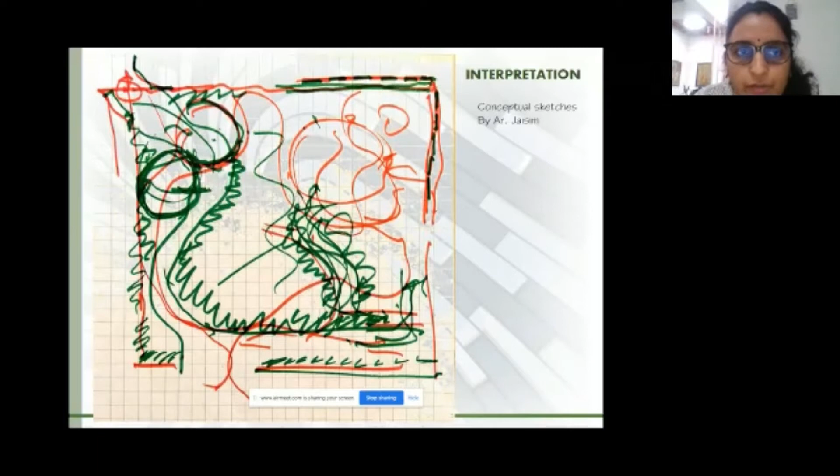So these were some of the initial sketches by Jaisim sir, where we see the land and something very organic taking shape. All the green you see is the greenery that finally got translated onto the land. We were trying to integrate the built space, the unbuilt space, and the greenery in between.

This was a little later when we started defining spaces, bathrooms, bedrooms, the actual names and physicalities of spaces.

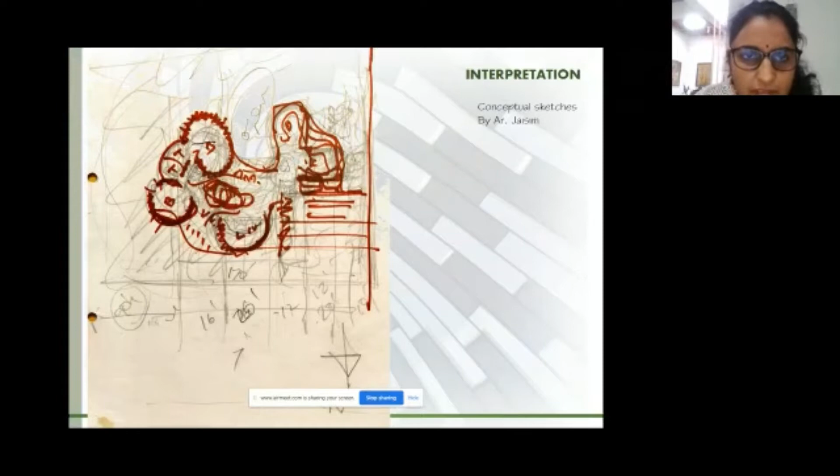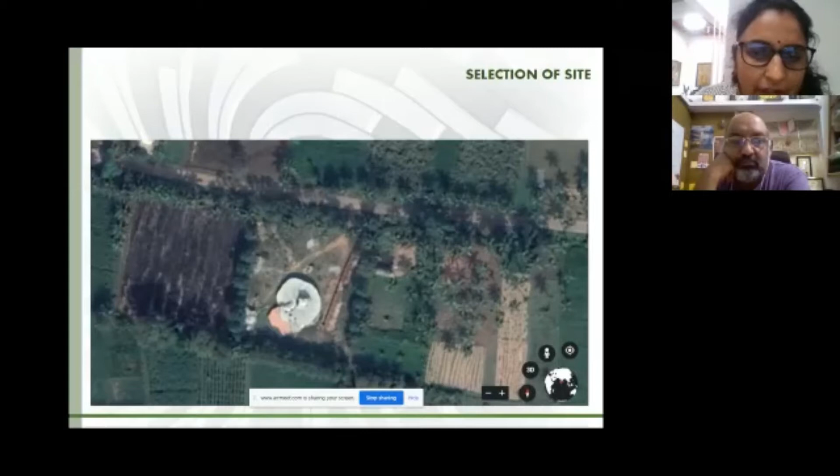So this was the original piece of land that we had to build on. And this wasn't the original site that we were going to build on. But when we did go to site, Jaisim sir saw this piece of land and said, why not this? It offers you beautiful views from everywhere. It's inviting, yet it's not exactly on the main road. It doesn't assault you, yet it invites you quietly in, and lets you explore the form and the building.

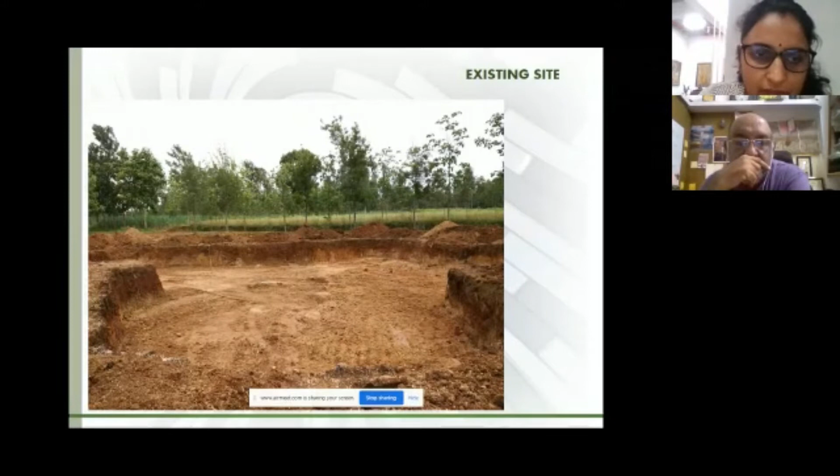Some initial pictures of how the site was. While the site itself was fairly flat with small mounds and little undulation, there wasn't very heavy, dense greenery around. There was very light, pleasant greenery that stretched for acres together. It was fairly good soil, a little gravel here and there, but apart from that, pretty good soil.

So just a little quick fact about the site. The home sat on a parcel of land that was approximately 70 feet in diameter.

Taking you through the site plan, the entire thing has evolved very organically. You don't find definitions of what we consider as rooms, 10 by 12, 14 by 16, or whatever. The entire thing is just as nature is, a reflection of the nature around it.

There's a pathway that leads you to the house, where there is an entrance that leads to a small transition space. Once you are in this transition space, you can make a choice. You either go downstairs to the more public spaces, the living area, the kitchen, the dining, the pond, and the little gathering area, or you go upstairs to the more private spaces, the bedrooms and the library.

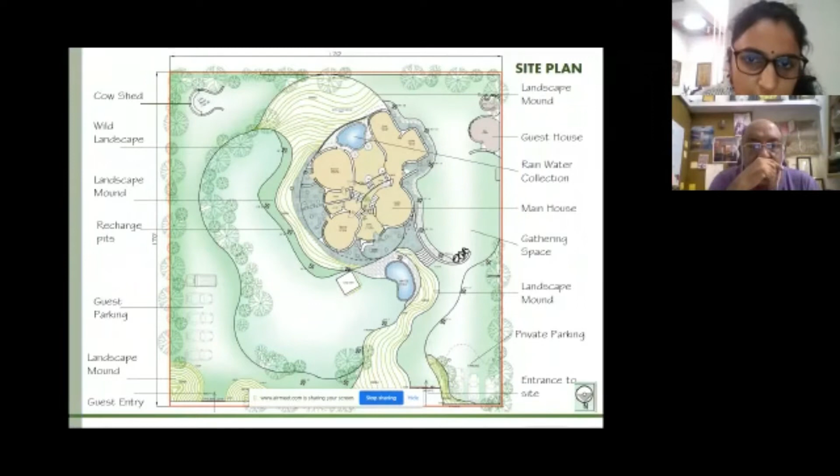If one decides to move up from the foyer this way, there is the daughter's bedroom, two bathrooms, and a master bedroom. They share a huge balcony because we believed the balcony shouldn't just be somewhere you go out and sit with a couple of chairs, but more a place to have activities.

You can read there, you can study there, you can do hobbies and crafts there. So it's quite a big one, a part of your room for both of them.

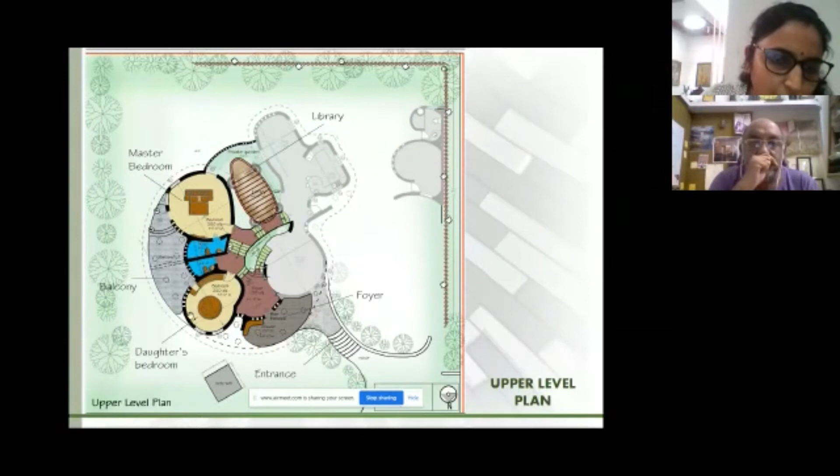It's an interconnecting space. There's a little courtyard in the middle that pulls in light from above, as you'll see later, and distributes it to the rest of the house. And the topmost level is the library. This is both symbolic and physical, knowledge being at the uppermost space of any being.

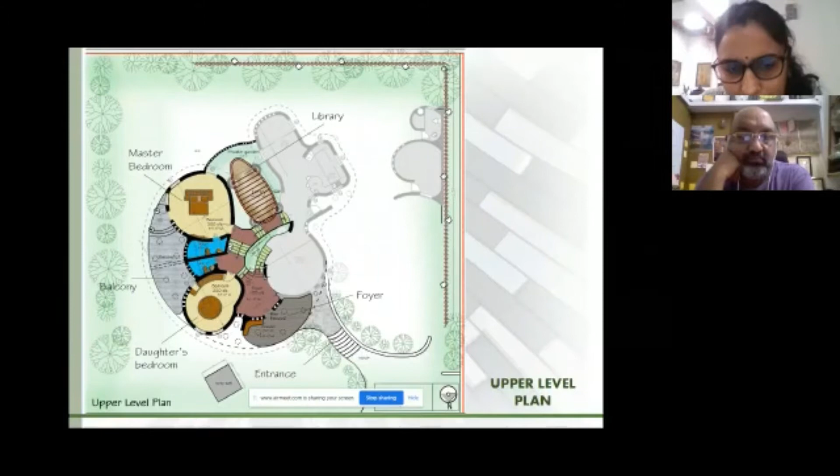If one decides to go down from the foyer, they get the public spaces, which is this living area. There's a little courtyard area that can be accessed from there, the kitchen, the dining. This pond is a rainwater collection pond.

There is a perforated wall come roof on top of it that lets rain in, but not too much either. So that pond collects it all.

There's also a little multi-purpose hall, since they had a lot of activities that involved gatherings of people, sometimes 25, sometimes 50, and we wanted a little hall that took care of all of that, whether it was social meetings, business meetings, or party meetings.

Onto the side, we initially designed a store with a bathroom that could be accessed from this area. But while we were building, the space turned out to be so beautiful that it's now converted into a guest house.

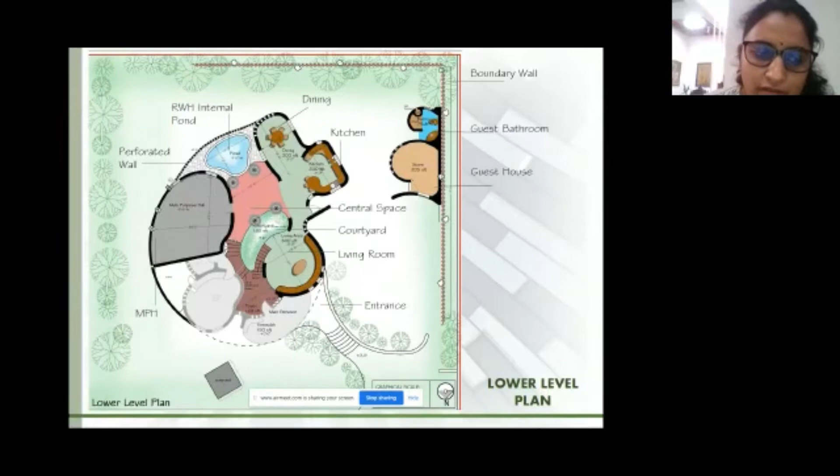As we started construction, one of the first things we did was make sure we waterproofed the area. This was a structure that was both framed and load-bearing. Before any of that happened, we did a base preparation, a very simple, clean, and elegant way of waterproofing.

We used canal liners and then did a layer of PCC. These canal liners went from the bottom of the structure all the way to the ground and a little above. So even if there was seepage, the water would travel along the liners and get out at ground level, not really getting into the structure.

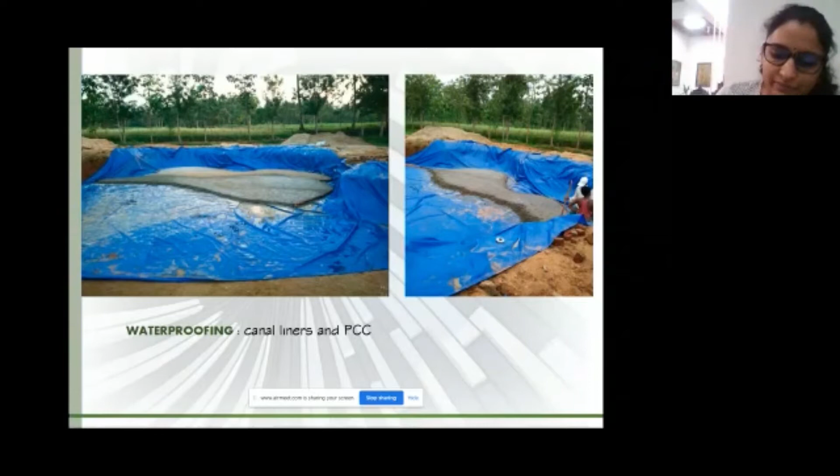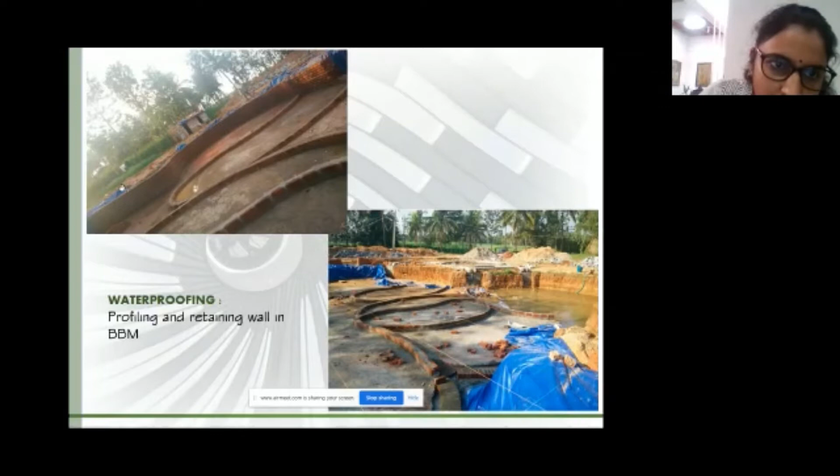Just after we did this, we profiled the space also. These are the canal liners that have come from the bottom area right to the ground level. Just after we finished it, it rained, so it gave us a really good chance to see how well the system was working, and it worked quite well.

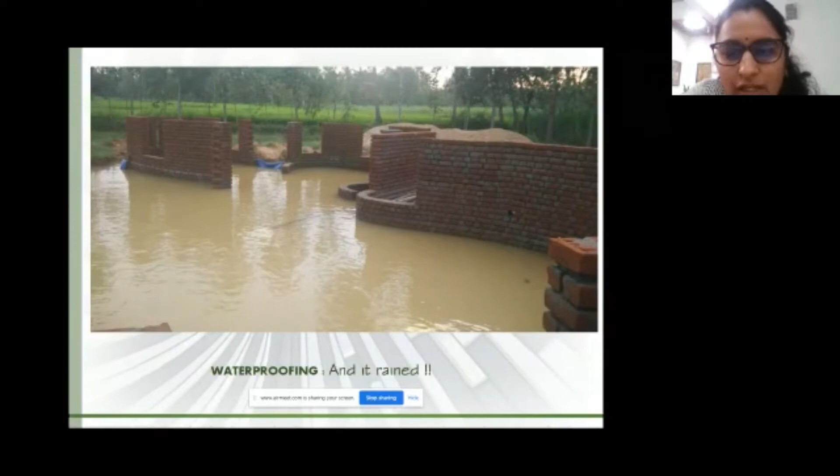Once we profiled the area, it was again all about surface preparation and building it up. The house sat on a large PCC bed. There was reinforcement here and there, but apart from that, we didn't do conventional foundations where we dug 6 feet, 8 feet below. This house didn't require that. As a structure, it sat on the PCC bed itself.

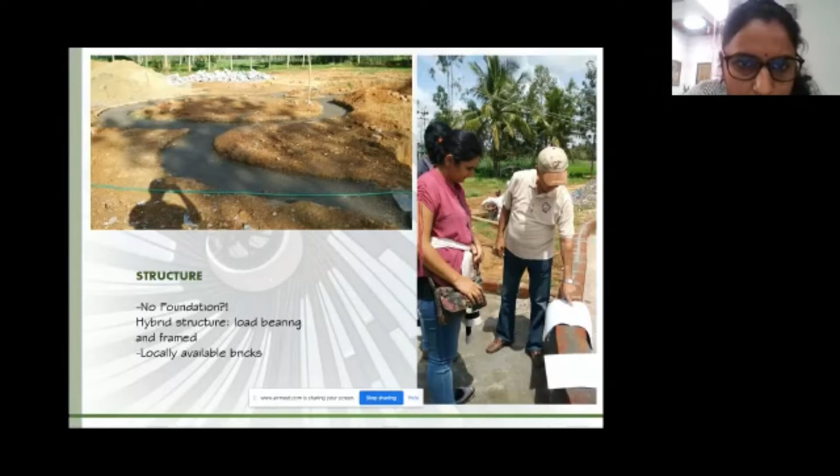The soil was fairly good. Parts of the structure were above ground, parts were below ground. The amalgamation of that let us work this system out.

A majority of the structure, we have used locally available burnt bricks. In some places, we have used them horizontally, in some places vertically. We've explored a lot of what could happen with a single brick in terms of masonry, in terms of how they can aid openings, and in terms of how they can add to the visual elements.

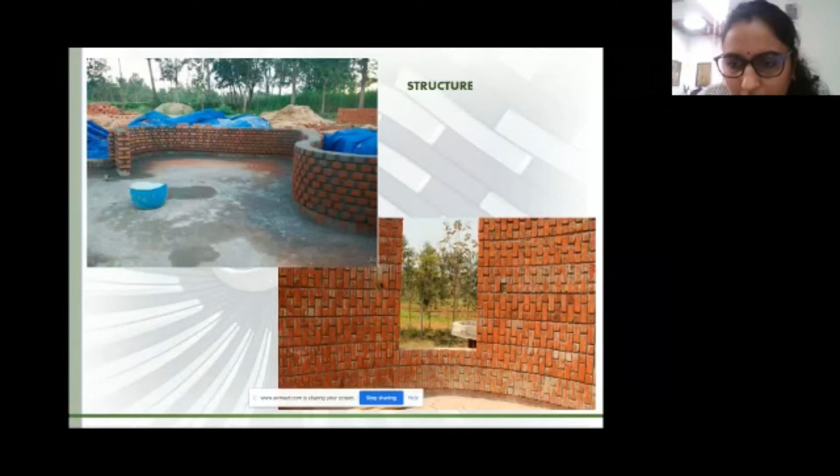So we experimented a little here and there. Then came the structure. The central hall has 4 large pillars on which the library sits. This particular portion of the house is attached and yet not attached to the rest of the house. So this was the base preparation done for the structure, and we erected pipes on these solid, beautiful rocks that were around that area.

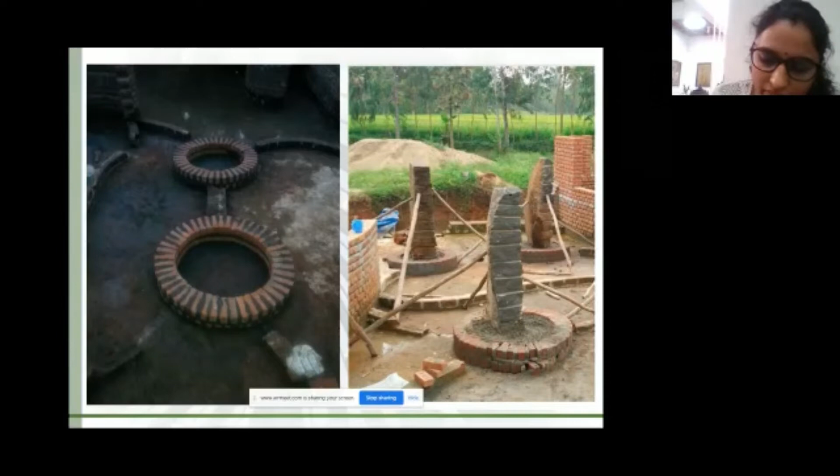At this stage, we had a lot of people coming and asking, why did you put them in the first place if you don't need it for the roof? Is it just for aesthetics? Is it just for fun? Does it have no function? We didn't answer anybody at that point because the best was yet to come.

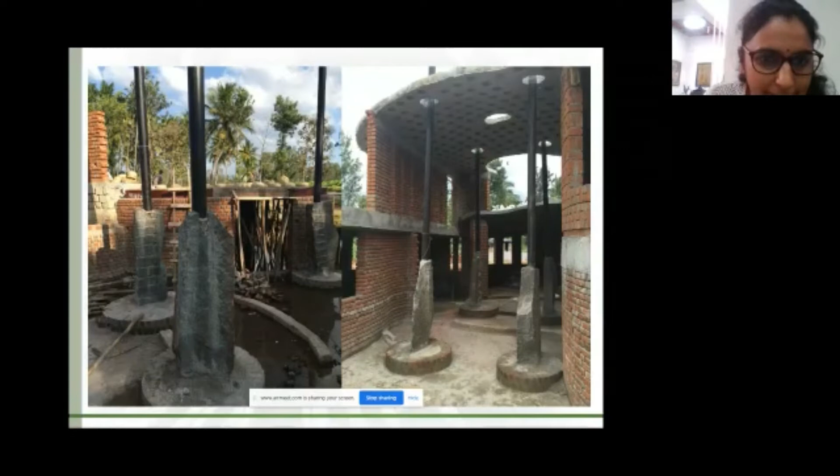Some more pictures of the structure as it was shaping up.

One of the most challenging things about this structure was the centering. As with the plan form and 2D, even the 3D form was very naturally flowing and organic. It reflected the elements around it. It was very difficult to get people to do centering that wasn't on a flat plane, or what they were used to with conventionally pitched roofs.

To do this took a lot of time, a lot of effort, and also a lot of educating the people there. Initially, when they saw the drawings, when they saw the model, most of the people who had volunteered to do the job said it can't be done. But it did take a little time to educate them, to go through it piece by piece logically and tell them how centering could be done.

And once that happened, the roof of the structure evolved in such a way that it started at the ground in one place and went all the way 2 floors up. These are some of the pictures.

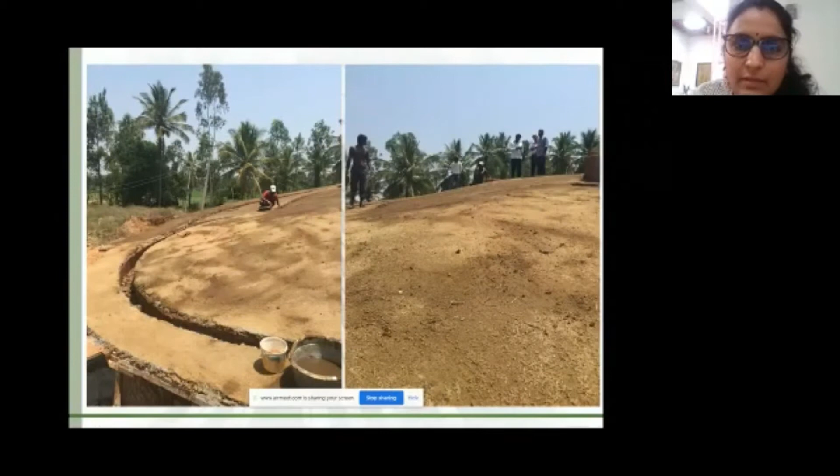If you can see this picture, that's the lowest point in the roof behind Jason sir there, and that's about 6-7 feet off the ground. It's like walking up a rolling hill. That's how the roof structure was.

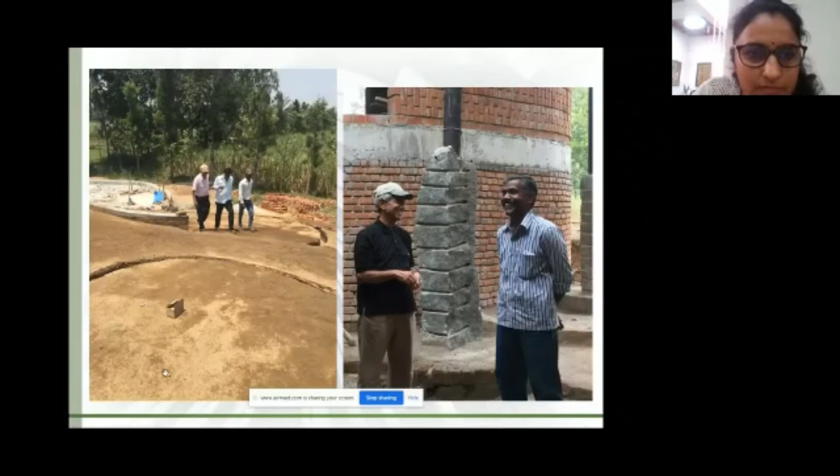So once the centering was done, we used custom-made pots and custom-made clay vents that would let hot air out from below to do the roof. Some places we used baskets that were made for this project because we needed them to be a particular diameter and a particular depth. Everything in this house was designed to detail. We didn't pick up anything that was readily available from the market. It wasn't a mass-produced thing.

We calculated, we designed, we sat and came up with all of these. These were made especially for the project. They let in light and took out hot air at the same time. And because we used these filler slabs, the entire place was cooler than what would have been otherwise.

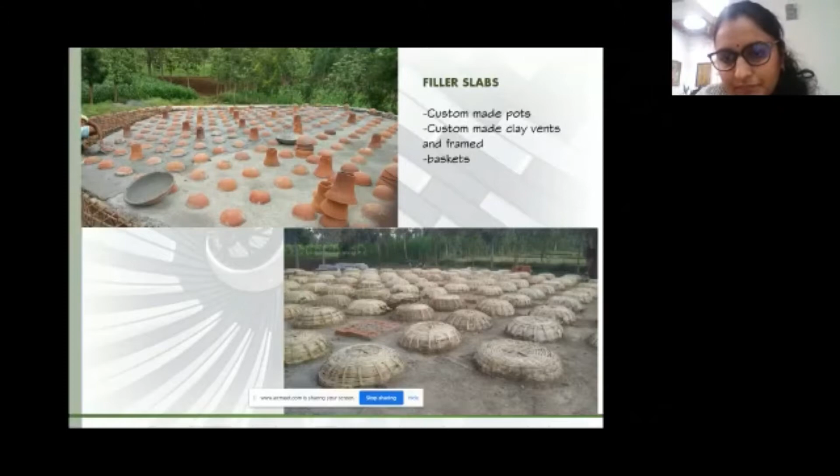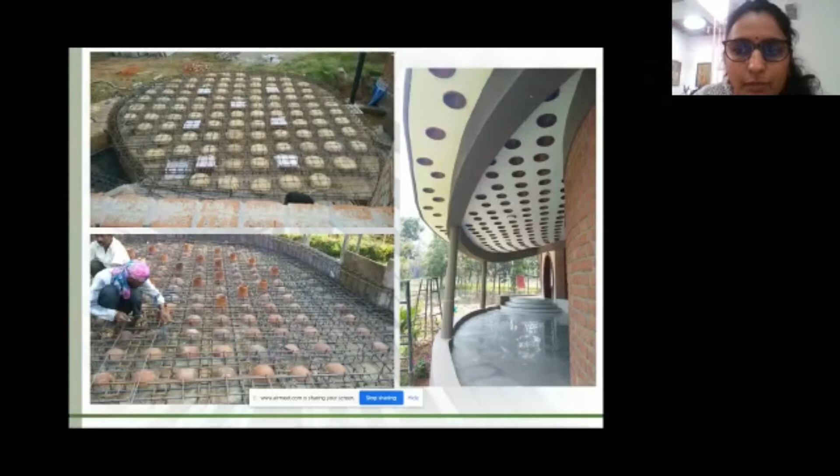This is steel reinforcement in progress. So this finally led to something as artistic and beautiful as this, which is a combination of art and structure, and the utility of how we use different elements as fillers to provide aesthetic as well as thermal comfort.

So these are some pictures post de-shuttering where you can really see the profile of the roof. Those little pots that you saw earlier, once the shuttering was removed, this was the play of light that we got.

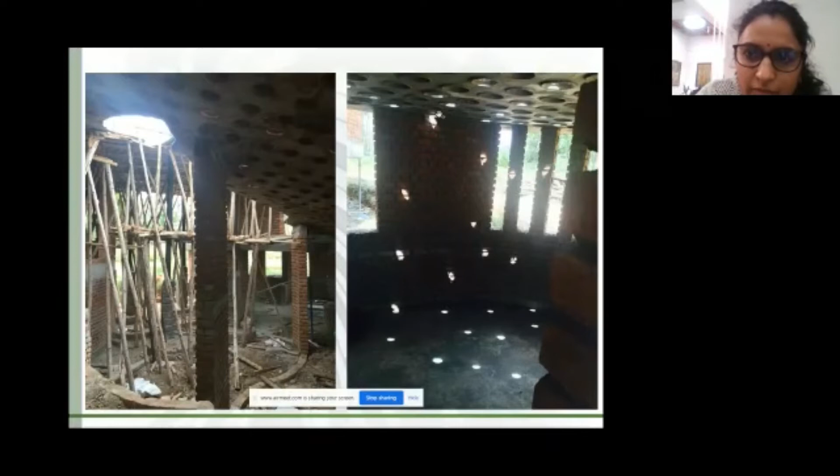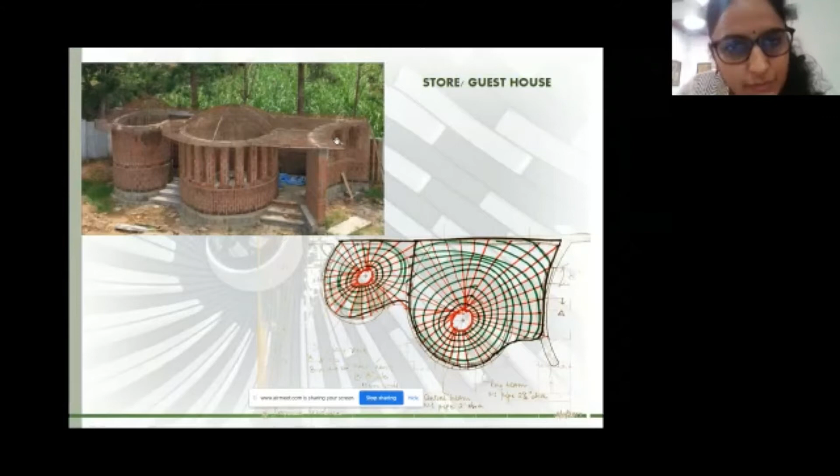The storehouse, which now has become a guest house, was also designed to reflect the main house, but then not take away the attention from the main house. So again, undulating forms and very gently rolling hills. This is the storehouse and the toilet.

So after we finished doing the major portion of concreting work and the slabs and the structure itself, the walls and things, the other interesting portions of the house began.

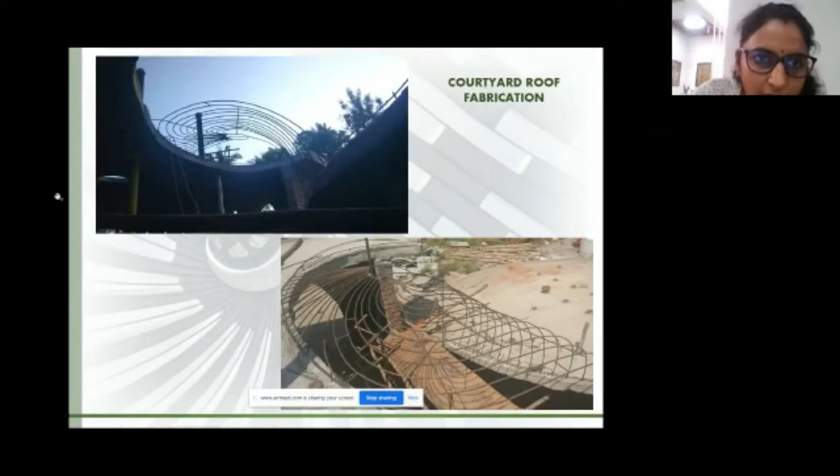The courtyard roof fabrication - if you can make out, the opening starts on one level but ends on another. This was a tough one. We had to have something that spanned not just the width but also in its third dimension.

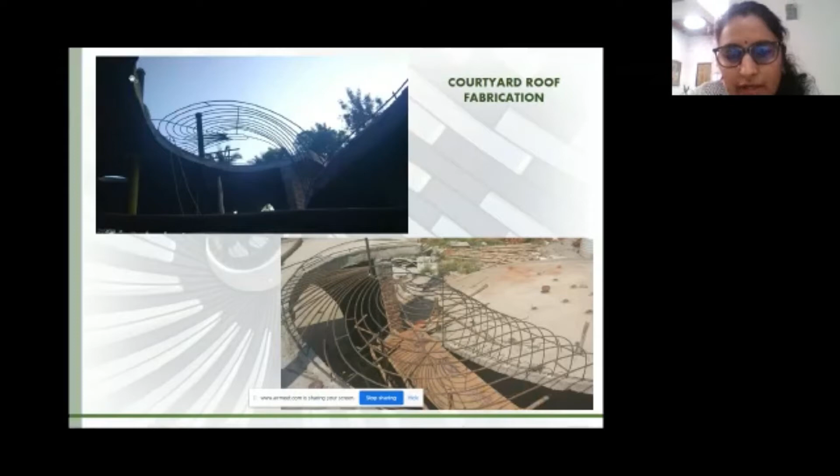So we began by putting these fabricated pieces together, and it spanned quite a bit, as you can see. It added dimension to the already existing organic roof, which is one of the reasons we didn't want to just make it flat and plain, because that would be completely against the language that was already followed.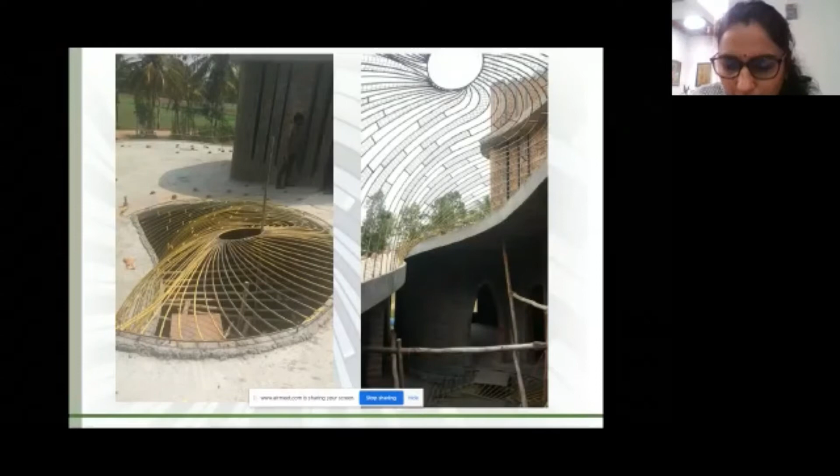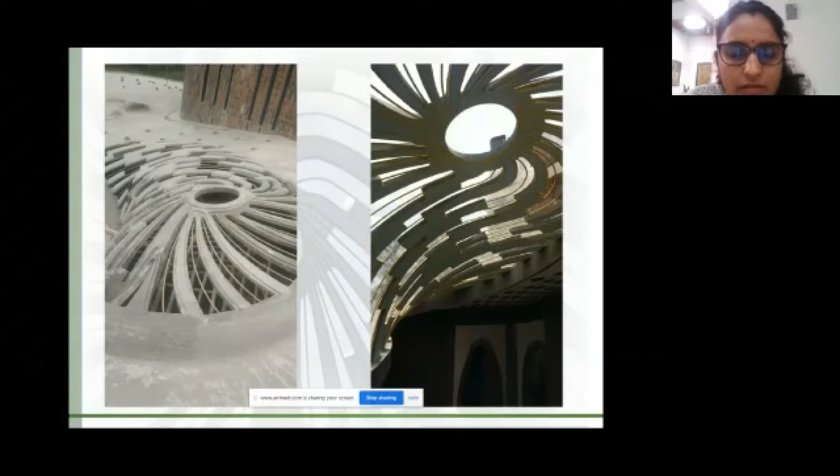This was the next step where we took the steel reinforcement and added a little mass to it. That big an opening and that much light would have been uncomfortable and heated up the space quite a bit. So this was our solution: a play of light where you could see glimpses of the sky beyond the skylight, while it wasn't going to be very hot and glaring below.

That as a finished product translated into this and this. This being the peak, the highest point of this particular area, has a heat extractor, which naturally keeps extracting all the hot air. So along with our thermal slabs, filler slabs, and passive interventions like the heat extractor, we ensured the house remained pretty cool throughout the year.

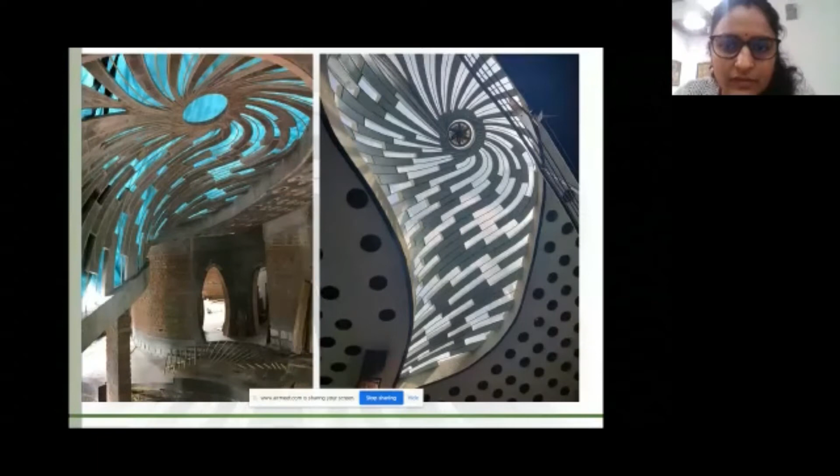As you can see, while you do get glimpses of light and glimpses of the sky above, it isn't overbearing. This was another interesting feature that we followed in the house.

This area is the library, and while we wanted the library to look out onto the fields beyond, we also had practical difficulties. The books couldn't get dusty, the books couldn't get wet in the rain. Security here wasn't an issue like it generally is in urban centers—there wasn't a problem with thieves breaking in. But the problem was more with animals trying to get in and rain coming in and destroying the books. So leaving it open, or just with a huge overhang, was out of the question.

Glass was again out of the question. That would have been everybody's first solution, but it would have generated a lot of heat and, quite frankly, a lot of maintenance too.

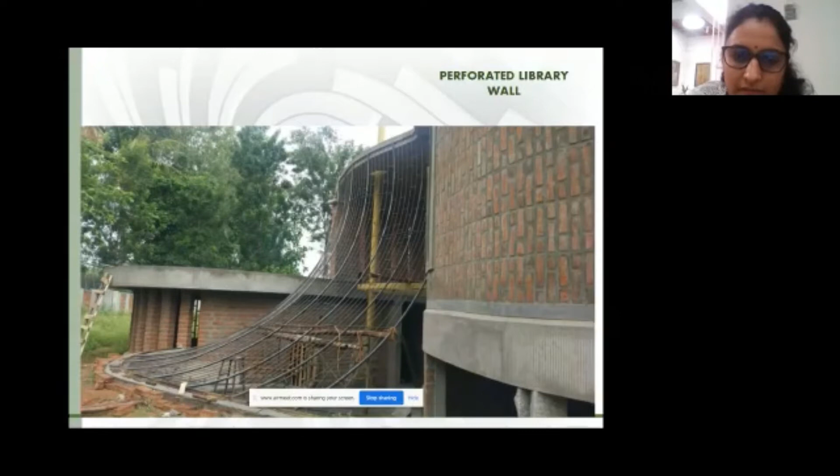So this perforated wall became a very interactive wall with nature. While portions of it remained closed to protect the books, portions remained open where protection wasn't needed from the elements. All the rainwater from this wall and a bit of the surrounding areas got collected into the pool below. Again, the construction process follows a similar principle to the skylight.

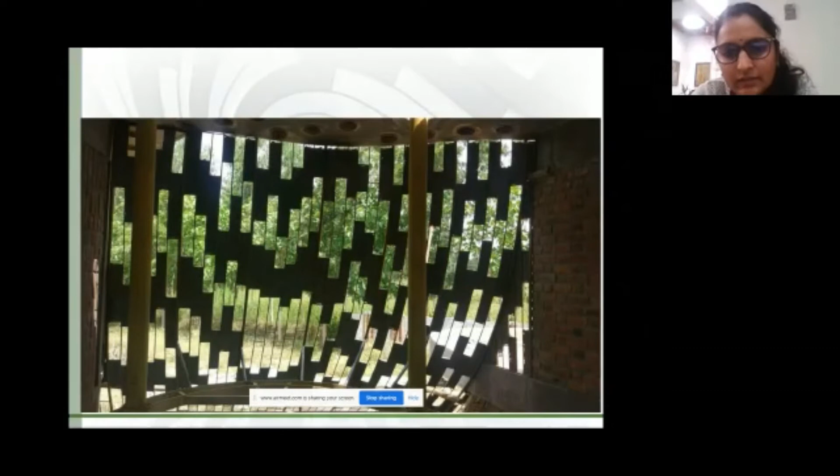This was the library deck, and this was the view beyond which we wanted to preserve as much as possible. So this portion of the perforated wall remains open with just a mesh, allowing nice rain to come inside the house and get collected in this pond. This pond is also part of a larger rainwater harvesting system.

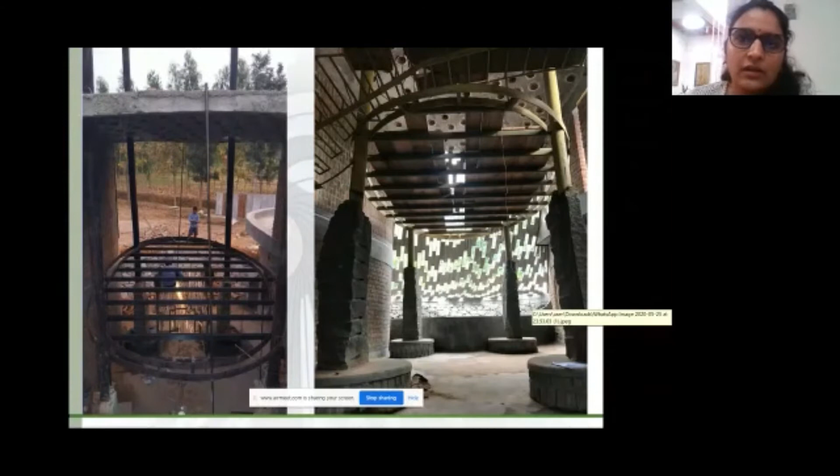This was the library deck, and everything above it was protected from the elements by this perforated wall. Essentially, we had cooler air coming here, passing over water, and then rising up. The hot air that rose would eventually be extracted by the fan. So in each part of the house, there was a mechanism in place to ensure it was thermally comfortable and relevant. This is how it looks from the outside.

The definition of why walls should end where they do, and why roofs should be the way they are, was really challenged in this project, because this is both a roof and a wall, not just a wall or just a roof.

So like I mentioned before, this project was challenging because we constantly kept trying to rethink what we take for granted—rethink what a wall should be, rethink what a roof should be. Why should rain not come in? Why should rain come in? Why should we not have sunlight? Why should we have sunlight? Basic questions you take for granted when designing stuff became things that had to be addressed constantly here, because we looked beyond that in this project.

That's how it is—a part of the terrace here. And this is the portion of a roof becoming a wall as it gradually comes down.

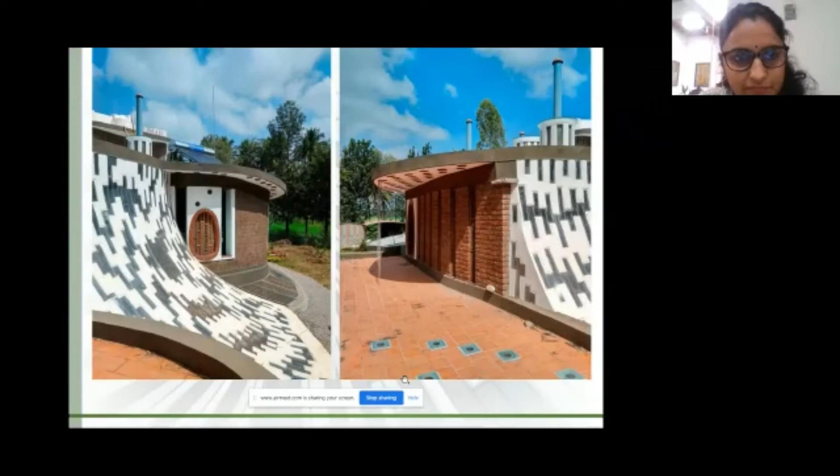So carrying forward the same theme of questioning and challenging, we looked at fenestrations—doors and windows. Why do we need doors? What are doors, and what are windows? Why do windows need to have shutters? Why do we need to have grills? Do doors really need shutters, or are we doing it just because we think doors have to have it?

Some basic answers that came out of this line of questioning: where they need privacy and security, in terms of being able to lock the space and not give access, let's have doors. Where they need symbolic entrances, we could do that too. But more than anything else, we decided that each door and each window would not be what is generally thought of as a door and a window.

So each of the designs that we did, we first did it on the ground. We kind of tried to see what would work, what wouldn't. We went through a process of exploring the material, the functionality, how the material leads to functionality. Is it conducive to the activity we're looking at? Is it okay in terms of structure? And then we did the real thing.

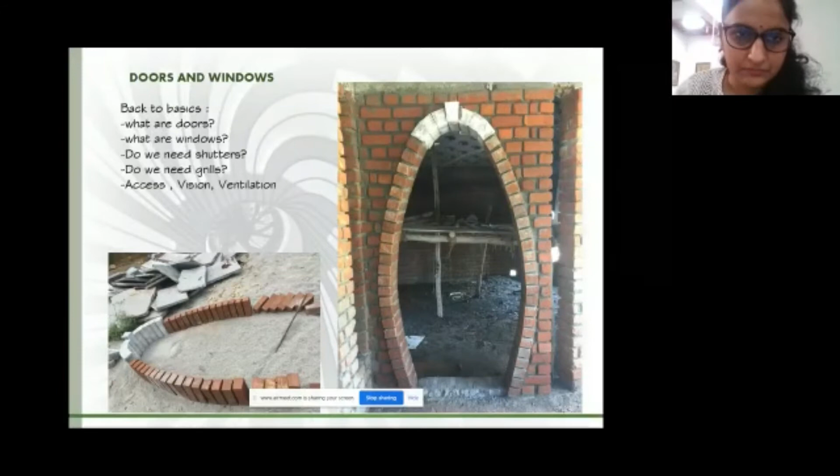So this was the final product of the doors. The expression of art happened through the doors also. It lets in a little diffuse light, but lets the viewer see a patch of art.

As you can see, this curve follows the language of the rest of the house. It's got a very simple timber frame—I wouldn't even call it a frame, probably just an edging. And we designed everything from the edging to the shutter, to how it would close, how it would open.

Everyday things like how the lock would work or how a handle should be fit into doors like these became challenges. Doing detailing in terms of simple things like locks and handles, they actually became some of the biggest challenges, and we went through it successfully.

If you can see, these hinges are specifically designed for these doors. These aren't hinges that you could probably go into the market and pick up a set of 3-4 brass hinges or something like that. They're very specifically designed to hold the weight of the door, for the shape of the door, and for security. The same line of questioning continued through the windows.

This is one of the ideation sketches from Sir initially. We tend to have grills because we don't want animals to come in, we don't want humans to break through. And there's a mental security factor associated with seeing grills, especially in Indian cities.

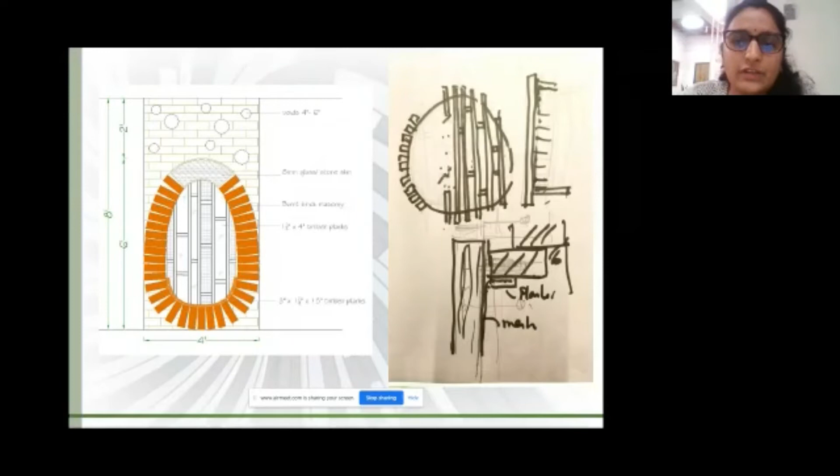So we tried to see if this grill could be relooked at—not in MS as we usually do, but in timber. And while being relooked at, could it also be a frame? Could it also not have shutters? Could it hold mesh? These were the questions that we asked ourselves.

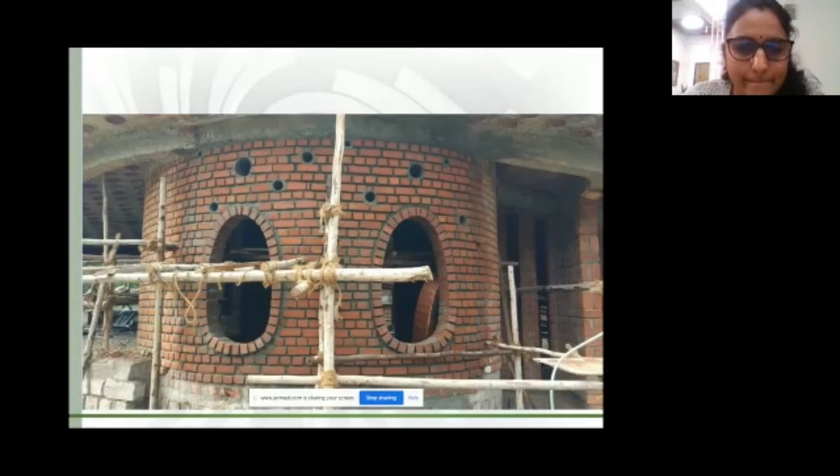And the answers are just coming up. Again, we did some amount of experimentation here.

So we finally ended up with windows without shutters. We have a visual element which is fixed in glass on either side of the windows. And then this is the ventilation element, where we don't have shutters, but only double mesh. So even if there is rain, it doesn't splash in too much.

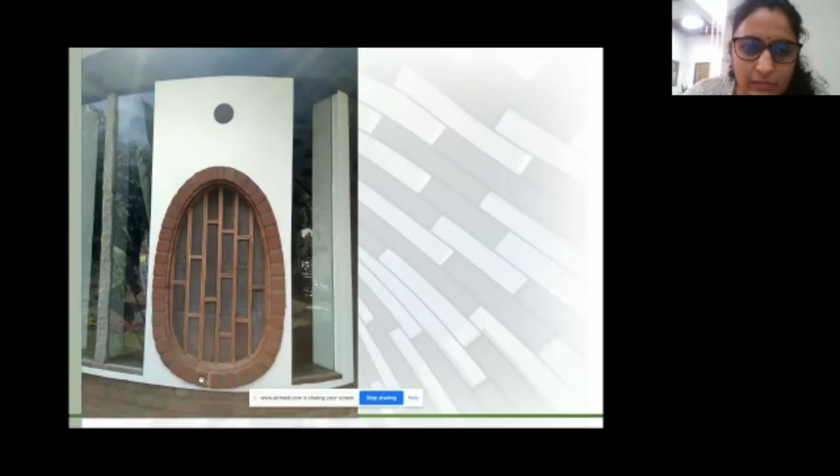Yeah, that's the final window that is on site today. This is the visual element which is fixed, and this is the ventilation element. A few more pictures of the work in progress.

This is one of my favorite pictures, because while it shows a beautiful curve form—almost as if an eagle were taking off—it also shows very minor details that are important to us architects. It shows that this column is passing through and through, so this slab has nothing to do with the column except just to say hi. And it shows the kind of detailing that we have worked on for the windows.

It shows the different materials that we have used for the roofs. It shows the hot air outlets that we have given. So while it is a composition of different elements and materials, it also shows the minute details that we worked on.

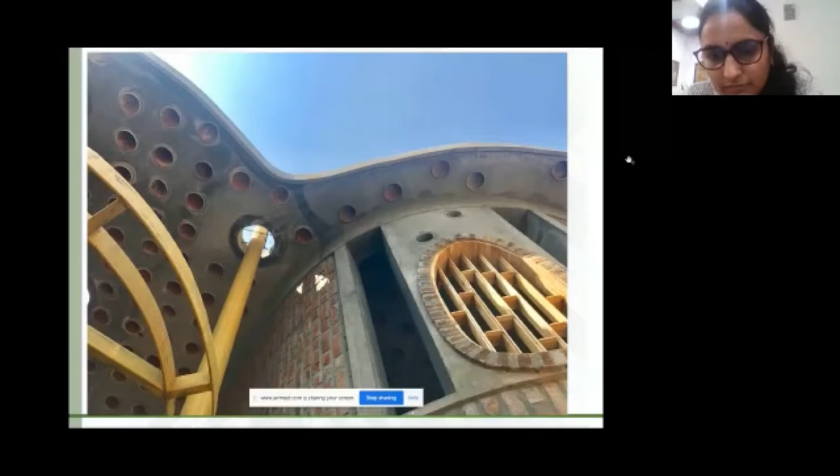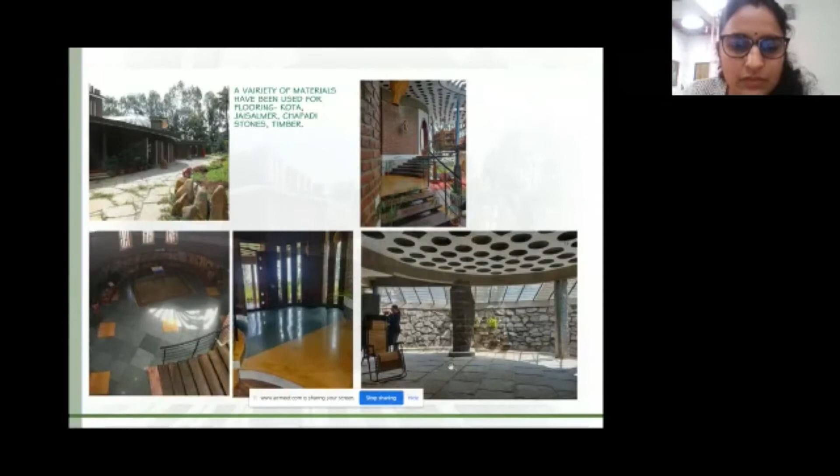Then some of the flooring materials that we used throughout the house. We used kota, we used jaisalmer, we used chapadi, we used timber, red oxide in places. We used planks of timber as well as smaller pieces of timber.

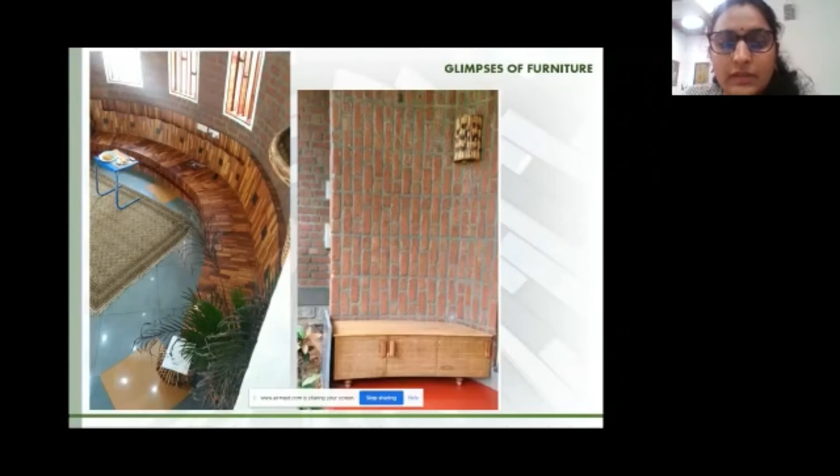While we did this house, we also realized that conventional furniture isn't something that's going to go well with this house. So as we started designing the house, the furniture was also getting designed. This is one of my favorite parts of the house.

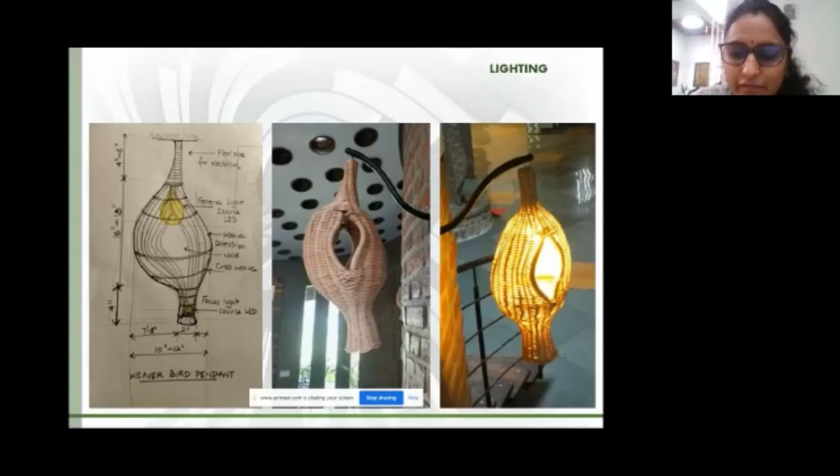The bird influence on the design was quite huge, so we decided that even the lighting fixtures should follow the same language. There's no point having something that doesn't go well with the central idea behind it. So we designed the lighting fixtures also - these were like little nests hanging from different portions of the house.

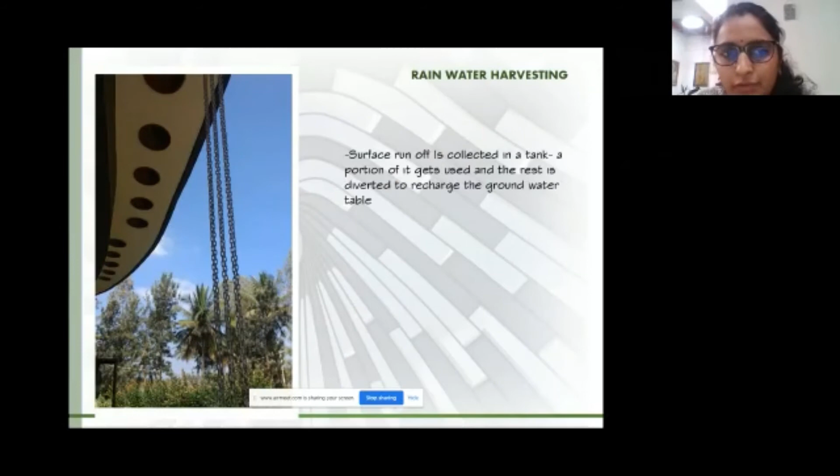Since we had a very large roof area, especially since it was a double curve, we had to divert that water somewhere, and the land it sat on was quite large. The final rainwater harvesting system was to collect all the water in two places - the pond you saw earlier inside the house, and an underground tank. All the water would be diverted to one of these two places, a portion used, and most of the remainder used to recharge the groundwater table.

Some of the challenges we faced on this project included the comprehension of an organic form. While Krishna Gowda's family and him were completely on board with us for the design concept, we did have other people asking us, your walls are curved, how are you going to put a sofa in? How are you going to fix a tube light? And this conventional notion that straighter walls are stronger than curved walls had to be dispelled.

They asked us, is it strong enough? You're doing a curved roof, will it fall? These were some of the questions that kept coming to us throughout the project, whether from people visiting the site or people we were discussing the design with. The most common question was, will it fall? Of course it didn't, but the comprehension of what organic forms can be took some time for the people around to accept.

Practically marking these organic forms for construction on the ground was a big challenge. While the pencil, the hand and the paper flow in unison, it wasn't like that on site. To get the curves right, to get the dimensions right - especially for the roof, since it spanned over planes - getting those markings right was a huge challenge.

What we did eventually was piece it together - we took it grid by grid, using 4 feet grids, and built it and marked it grid by grid. There were a whole lot of marking drawings for this project, more than any other project we've ever worked on. But eventually we managed to mark it, and there was no issue with that.

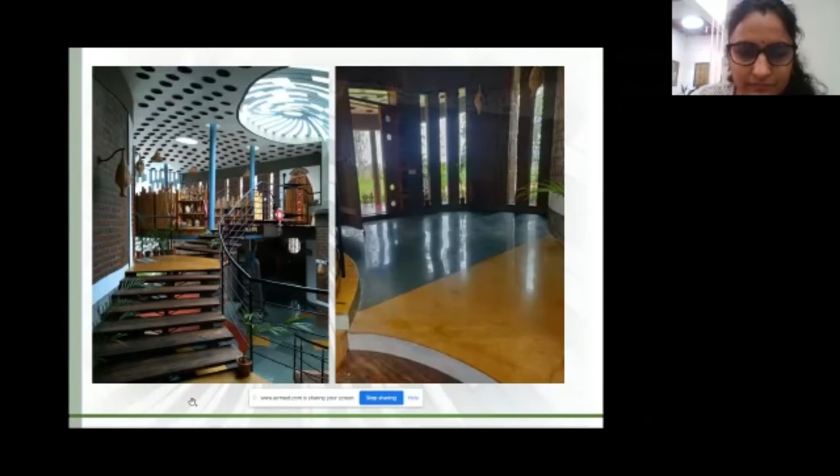This is the journey up, which culminates in the library, and you have two rooms on either side of the landing to the left. This is the congregational area.

Below ground, as you can see, we've used stone to retain the earth on the other side, and this is our ventilation system on top that you can see here. So when it rains through here, we do have a collection system along the periphery that will divert the rain to the rainwater harvesting tanks. The supports used for this particular slab again was rock, locally found.

This was a very interactive session with some of the younger architects and students when they went to explore and study the house, the same space, the multi-purpose space.

Elements of traditional living that we have generally seen in the Karnataka region, like having these kattes, or having a rough floor where people can just spread out a chape and sit, those kinds of elements were very important in this particular house, because there was a style of living that we wanted to take forward.

A lot of the times, the spaces that we build kind of dictate the life that you might lead, the style of life that you might lead. While we did want to have futuristic and upgraded systems in terms of technology, in terms of other elements of construction, simple things in how they lived, we did not want to change.

As one comes down the stairs from the foyer, this is the living area. As you can see, we've built it into the space, the seating into the foyer area. As you go up, this is one bedroom on that side and the other bedroom on this side.

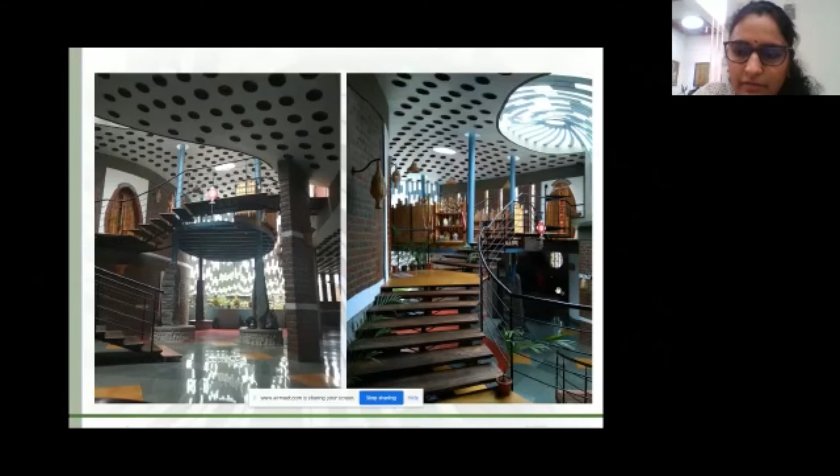Here you see a glimpse of the skylight, which is above this courtyard area. And as you walk into the library, you really feel the skylight, you get to feel the expanse of it, the lightness of it as you walk up to the library.

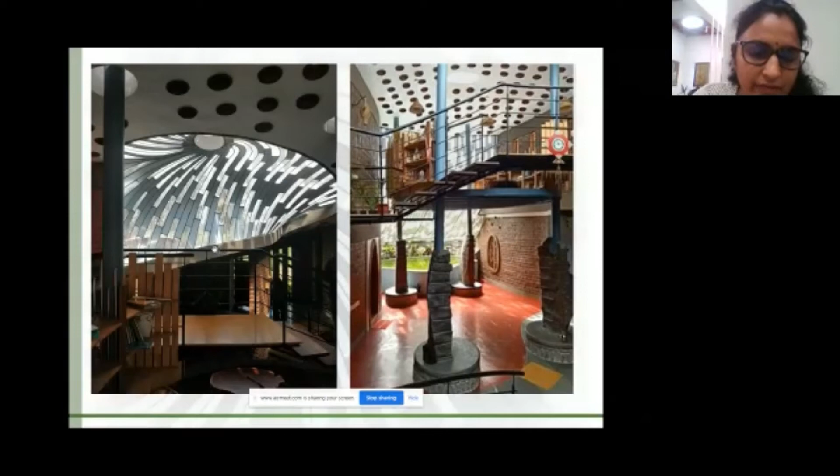The concept of whether the skylight should be completely flat, completely horizontal, as most skylights are, or a little curved, that completely changed, because here, as you can see, it's completely vertical, and as you go up, it curves in to become a roof. This is the water collection pond.

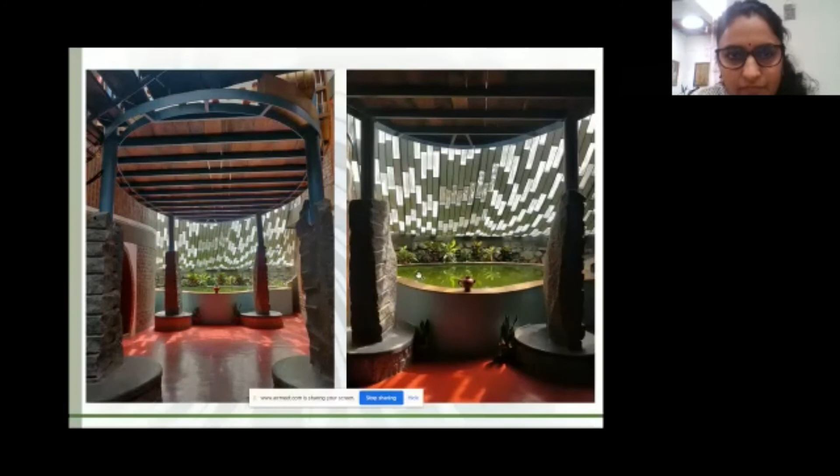Just below the perforated wall. The bedrooms.

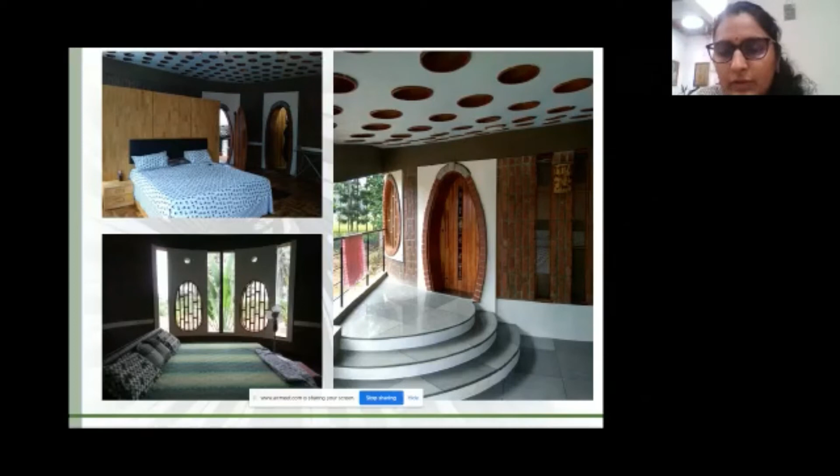Bathrooms, where we decided not to do traditional tiling, but instead we've got all these marbles that are in the wall.

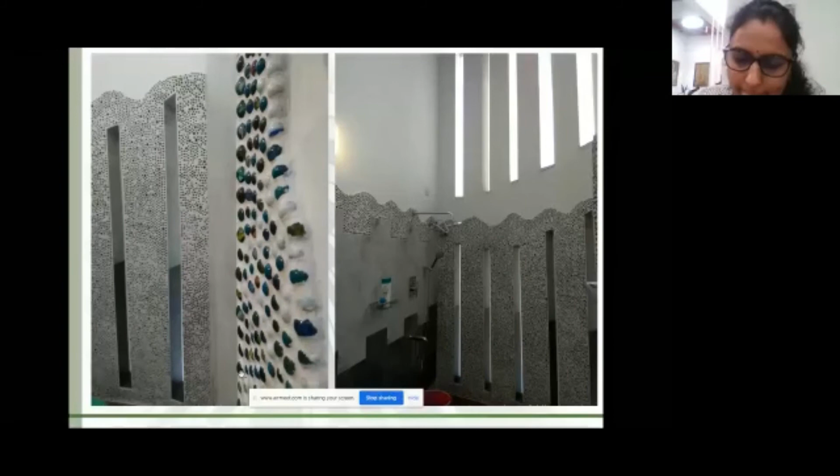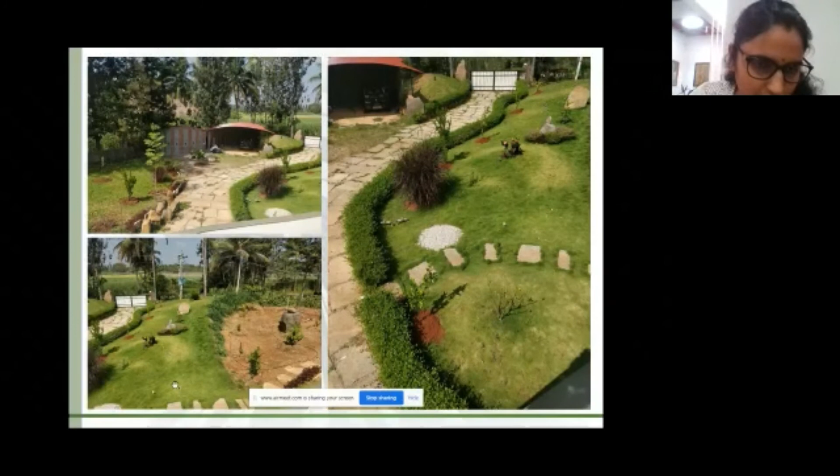It was a very happy occasion for us when this building won the award for Ultratech Well-Built Residential Structure last year. It was a very proud moment for us. So I think this wraps up the journey that we had with this particular building.